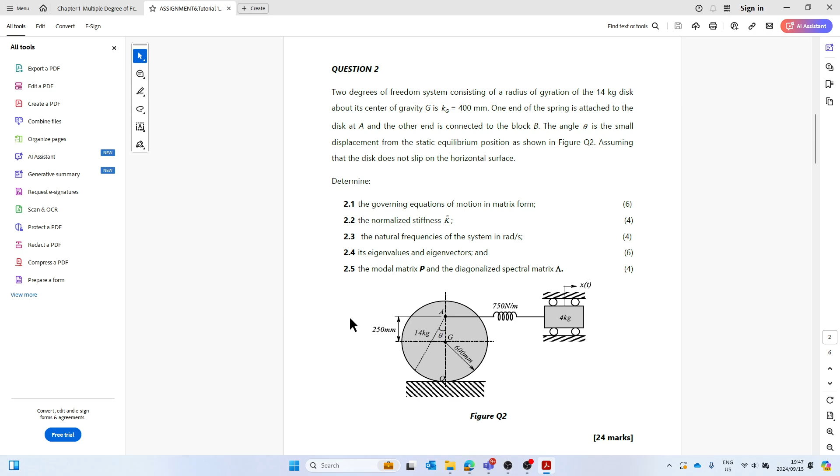So what we're gonna do tonight is start with question 1 and see if we finish it. If we still have time, we can take another question or not. Tomorrow we will do another type, even question 2, that has normalizing stiffness, natural frequency, eigenvalues, and this one. So basically we will be answering all the possible questions that can come under this topic before we move to the next one. You see a lot of figures and this thing looks complicated, but they are cheap.

It's not much, it's cheap. So what you're gonna do without wasting time, we're gonna move on to question 1.

So Mabuza, what we did today, I simply explained how to normalize natural frequency, eigenvalues, and eigenvectors. The good thing is we have not solved any problem yet under this.

Hello, yes I'm talking. I think you were experiencing network issues. I'm not sure if it's my side or your side, but I'm fine. Then it's not your network, you just went quiet. I was just reading something. Oh okay, yeah, because you just went quiet. Okay, then you can continue.

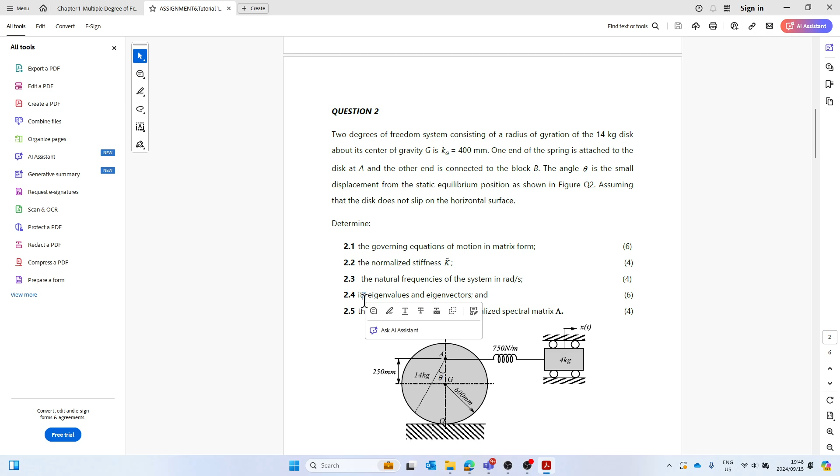Now, what I was saying, basically we explained this, so we have not yet solved a problem on that. So, yeah, what we're gonna do, let's start by solving a question.

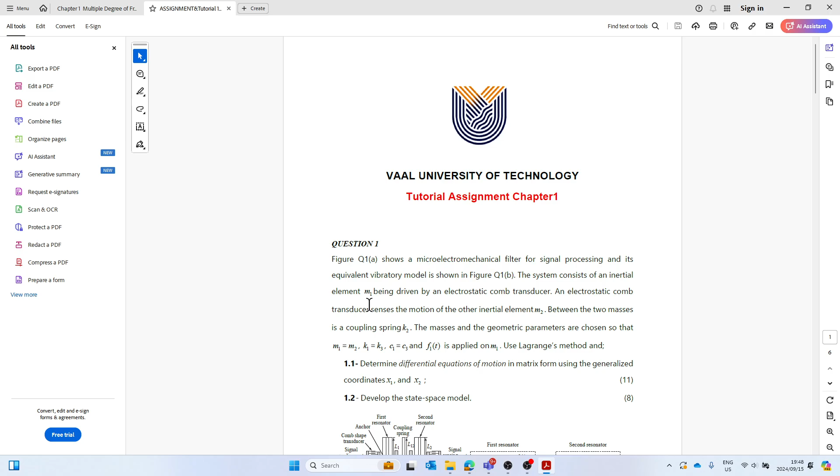Yeah, what is question 1? Did we do question 1? Wait, let me make a call, please.

Yes, talk to me, Malina. Talk to me, you say that we should not redo. Yes. Ah, Mr. Kwoto, I'm okay.

Send, let me see. Hey, Mr. Kwoto. Nah, I'm checking, where is it in the group? Uh, is it the same problem? Let me see.

Yes, did we do the steady state question? Did you do the steady state? Can you please add a quick recap of what you did? Wait, when did we do this one? Eh, okay.

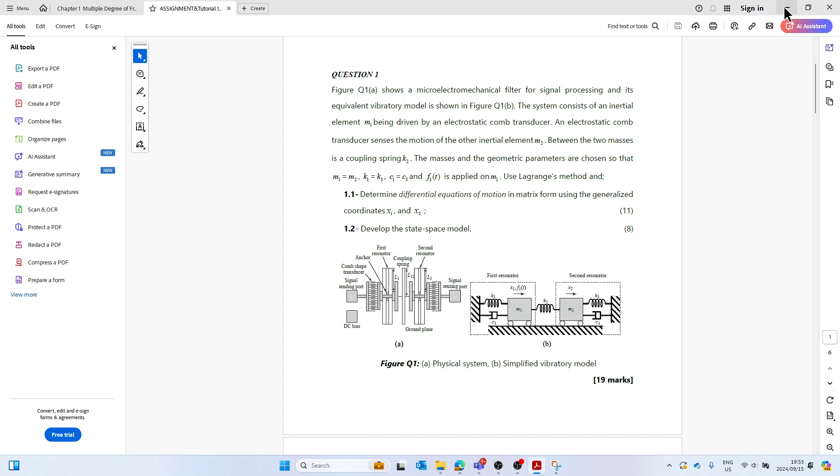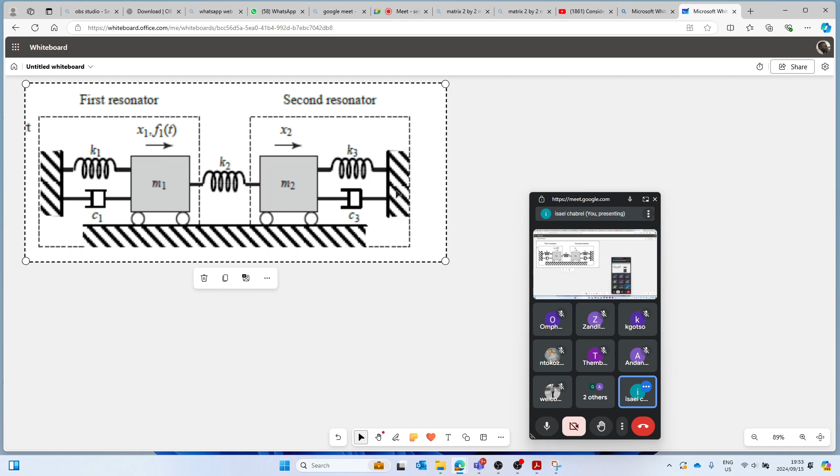Okay guys, this is question one. I think I received the text - can you please quickly recap what you did yesterday so I have a clue where you are?

I don't know how I can do a recap on that. Definitely don't know how, but literally we did not do any calculation basically.

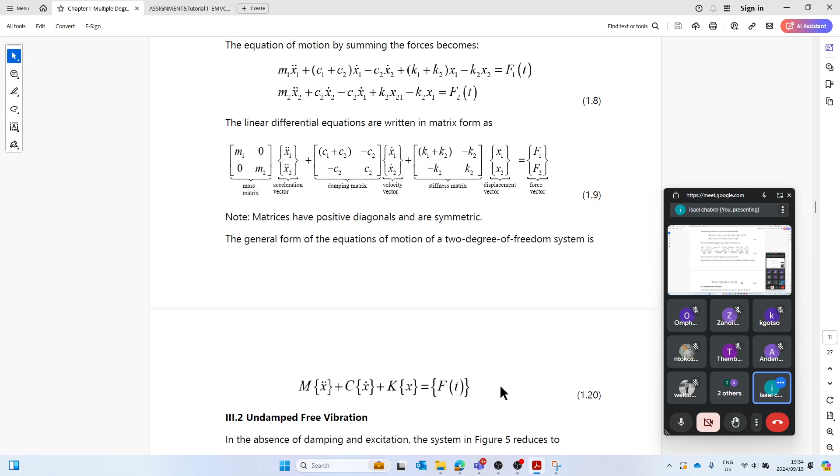So what we did, we went through this explanation of how they got the angular speed.

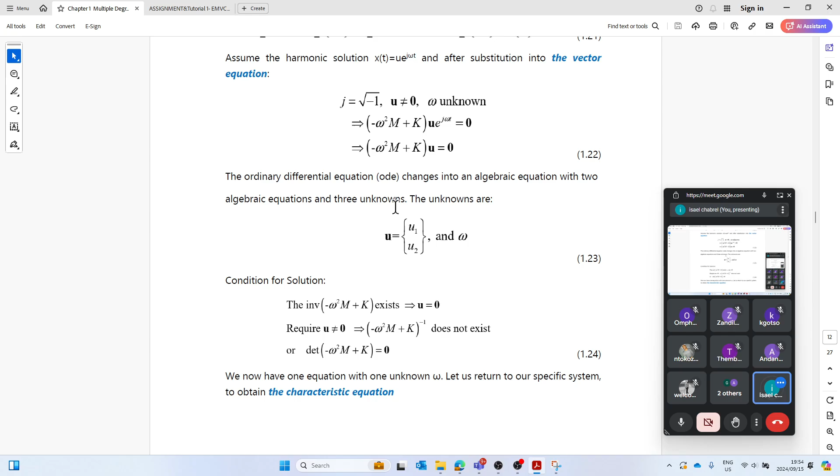Yeah, we actually saw how to get this vector, and what just by explanation.

So what I was saying is this question of eigenvectors and eigenvalues, they are under question 2 and some other questions here. So actually you did not miss much, if I can say. So what we're gonna do, we're gonna see them through our questions.

We're gonna find them through our example, actually through the question given to us. We're gonna solve those problems.

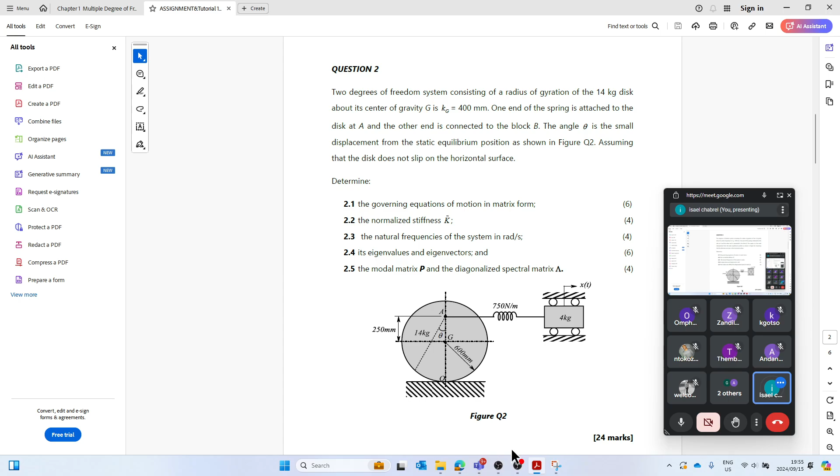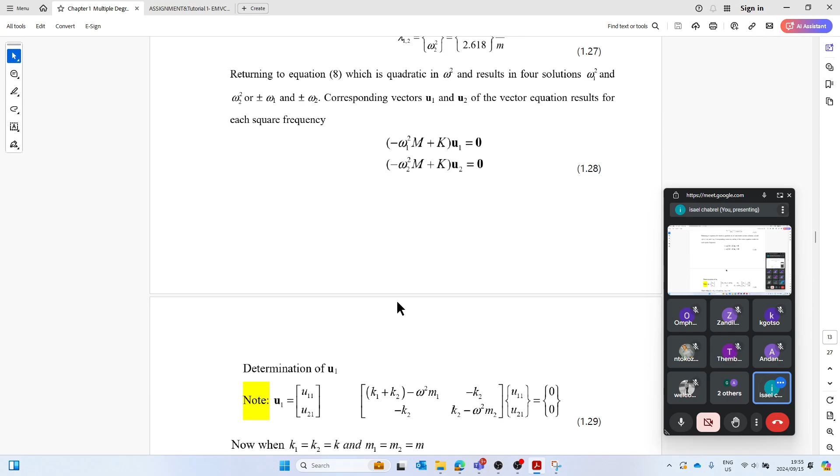Because if I have to do a recap, it means I basically have to explain how they get the angular speed here, how they get the eigenvalues, how they get the eigenvectors, and that's gonna be a lot of time. And yet we still gonna have to solve it, which is basically the same thing. So what I can just ask you as a favor is make sure you attend all the classes.

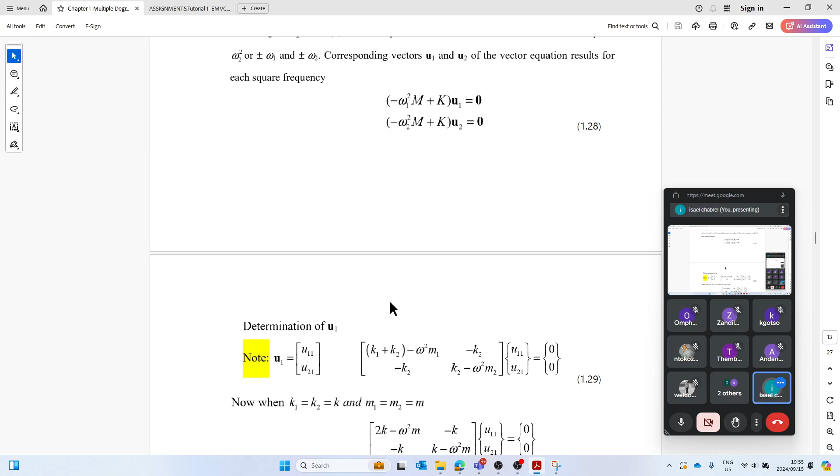So that we can all be on the same page, because during the question we're gonna solve everything that is under this topic. Yeah, I think that's the best we can do.

So what's happening is this is your question one. They want you to find the differential equation, and the method that we use here is Lagrange's. We've got a couple of videos on my YouTube channel about Lagrange's.

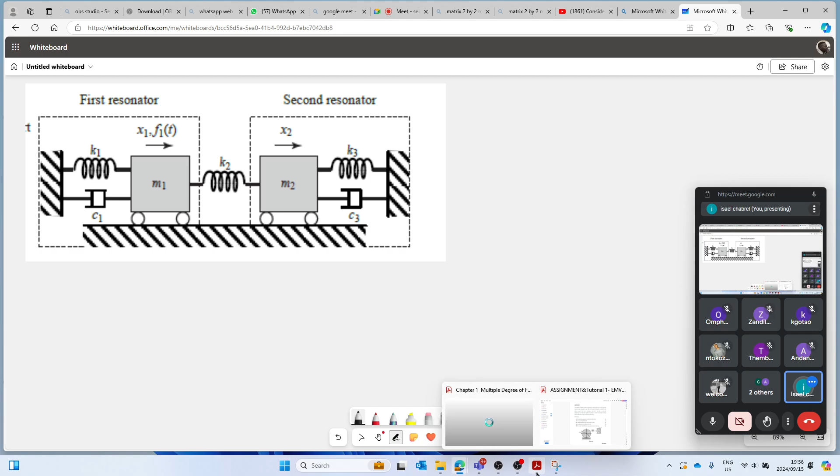So what you have here, you have a system of two masses, M1 and M2. The problem is simply saying for question one, microelectromechanical filter for signal processing, its equivalent vibratory model is shown. The system consists of inertial element M1 being driven by an electrostatic comb transducer, and the electrostatic comb transducer senses motion. This is just the English explanation.

Between the two masses is coupling spring K2, and they are saying that the masses and geometric parameters are chosen so that M1 equal M2, and K1 equal K3, C1 equal C3, and Ft is the applied force on M1. Use Lagrange's method.

This is the method that we've been using to always get the differential equation. So we're gonna use this Lagrange's method to determine the differential equation of the generalized coordinates x1 and x2, and then we're gonna develop the state space model of this system. So yes, let's do it.

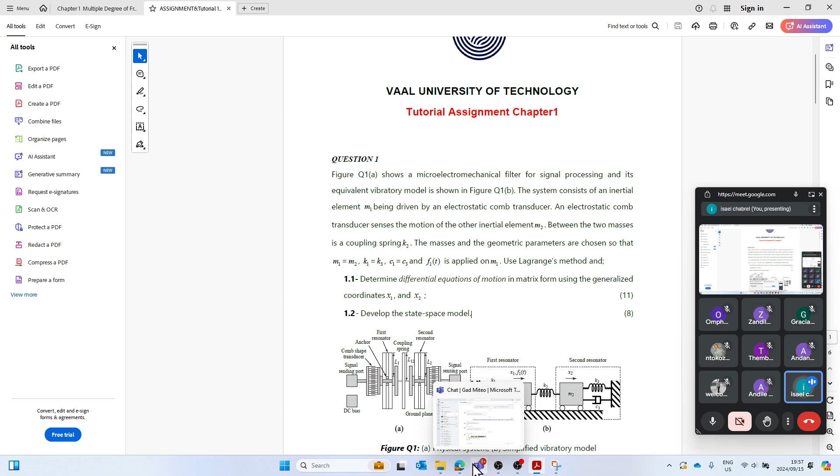So how do we do Lagrange's? What is this thing? This is what we have. Take this down, this is taking my space.

So Lagrange's, this thing is under - there's one or two videos of Lagrange's on my YouTube, you can check it.

So what we do on Lagrange's is we identify the kinetic energy, the potential energy, and then the damper. There is a way they call it again, but it doesn't matter if we don't remember it. What matters is how to solve.

So what do we do? You write the kinetic energy, Chi. Kinetic energy is equal to half - here you have M1 X1 dot squared, plus half M2, this is how you write Lagrange's, X2 dot squared. Remember, kinetic energy in physics, we say it is half mass times velocity squared.

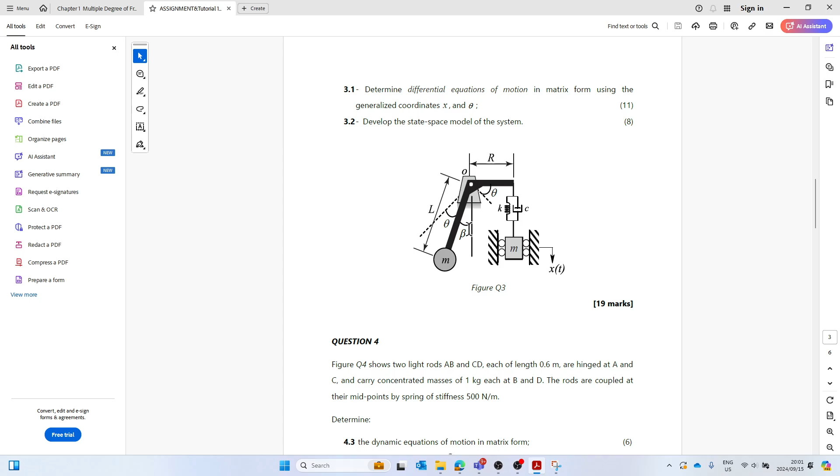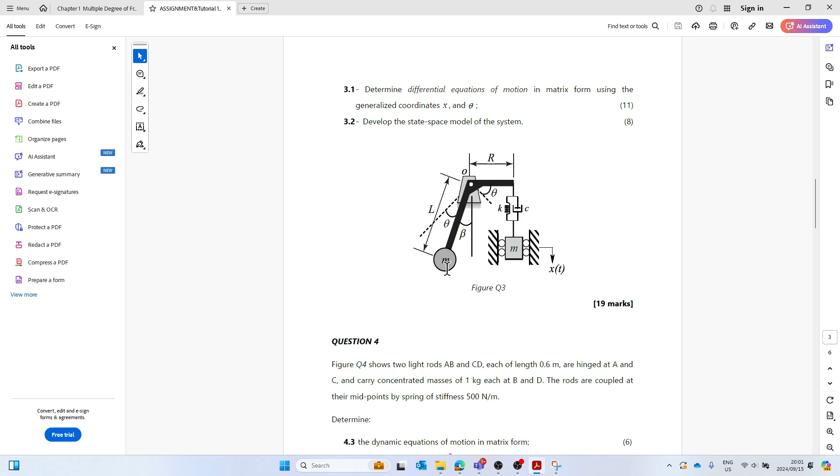By that, what do I mean? If you look at a system like this, just a quick clue, a system like this one, it will have potential due to the weight because this object is rotating. Therefore, as long as it is rotating, it means there's a difference in height, and if there's a difference in height, it also means there is potential due to weight. Also under this case here, you see the potential due to weight.

So in our case, our mass is linear. You can see there is no change in height of the mass. That's the reason why, when we are solving, we will not have any potential due to weight. So under this circumstance, we only have potential due to the spring.

So in this case, we're going to have half for the first one, for the first spring, half k1 x1 square plus - but now look at this spring 2 here. Spring 2 is between m1 and m2. Due to that, it has to have a change. So what is the change here? It is half k2, and the change is going to be between displacement of m1 and displacement of m2. So under this case, it's going to be x1 minus x2, everything squared.

That's it, and then you move to the third element here. It is this spring attached to this mass, which is simply plus half k3 x. The displacement is x2, displacement due to mass 2, x2 square. So any questions, guys? We can do this fast.

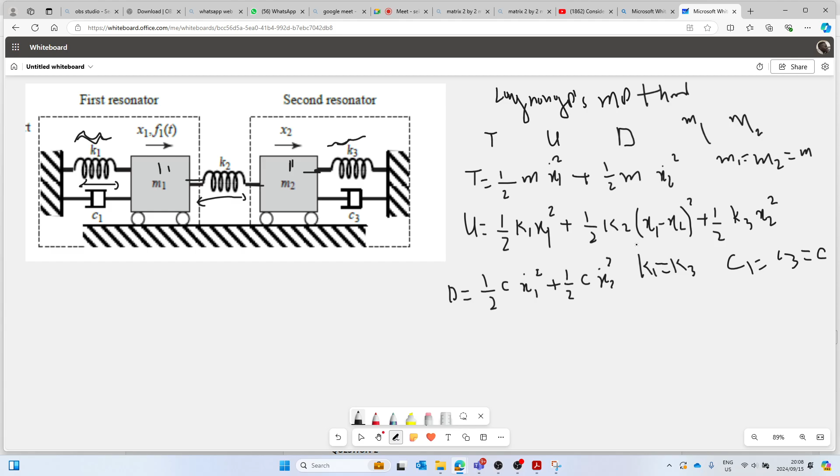Here we go. So what do we do? If you remember Lagrange's formulas, this is the formula of the Lagrange.

Hey, yes, Mr. Maras. Sorry, I'd like to ask something here. No, you're not sorry, you must ask if you have something. I thought I'd disturb you. No, don't.

For the kinetic energy, the x's are the velocities, for the kinetic energy.

Mr. Maras, to answer your question, remember in Math 1, if you have displacement x, if you differentiate this in terms of time, it gives you velocity. If you differentiate velocity in terms of time, it gives you acceleration. But in physics or mechanics, the velocity will be represented as x dot, and the acceleration will be represented as x double dot. So the kinetic energy, because we know from physics, it is half m velocity squared, and the velocity is squared, so the velocity is being replaced by x dot only.

Okay, and then for the potential energy? The potential energy is the displacement. If you guys remember, Mr. Maras, for the spring, the formula is force equals k multiplied by x.

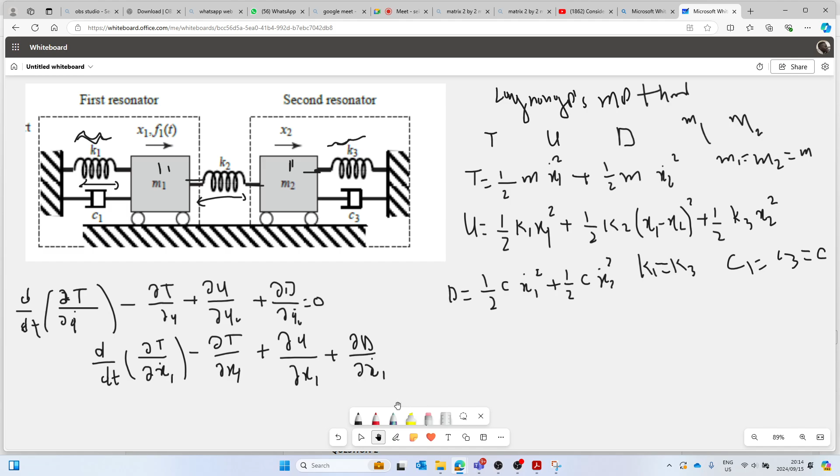So what do we do here, guys? Look at the formula how it's written, but if you're comfortable enough, if you've been attending, you should be comfortable when we talk about this partial derivative. This is what it means. When we say partial t, partial x dot 1, we are talking about partial derivative. Do you know what is partial derivative? You are differentiating partially the kinetic energy. So what does it mean? You scroll up, you look at the kinetic energy equation. Wherever you do not have x1 dot, it is 0. They are taken as constant. Differentiation of a constant is 0. So under this topic, we only have x1 dot for the first one here.

So differentiation, Mr. Maras, when we differentiate this, it's simply going to give you mx1 dot.

Hey, you're moving too fast, eh? I won't move so I'm fast. Confused here. Can you please start from the first equation? Can you please just explain clearly? Oh, the equation, eh? Sorry, Sisi. I'll go slow.

Okay, this is the general formula of Lagrange. The Q here simply stands for the variable that we are working on. So under this topic, we only have two variables, which is x1 and x2. So we're gonna be doing the Lagranges of both variables. First, we start with x1. So it simply means wherever you have a q under this formula here, you replace them by x1. Is that one fine?

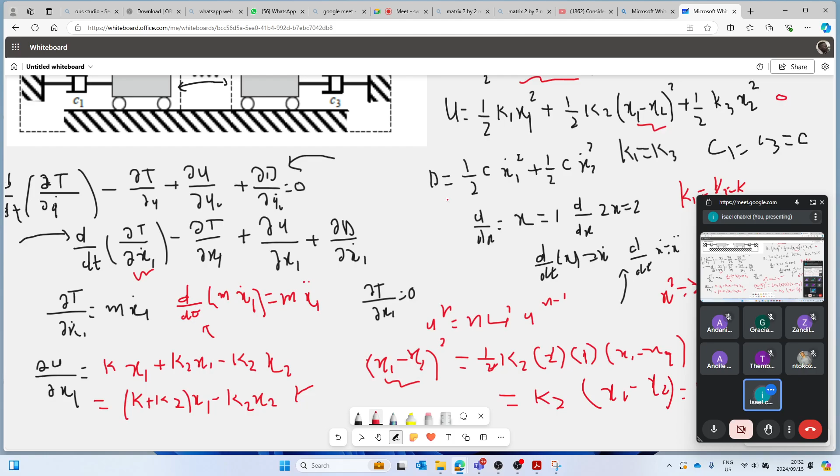Yeah, okay, this is where we were. So now we have to do the same thing with also here the damper. Now we have partial damper.

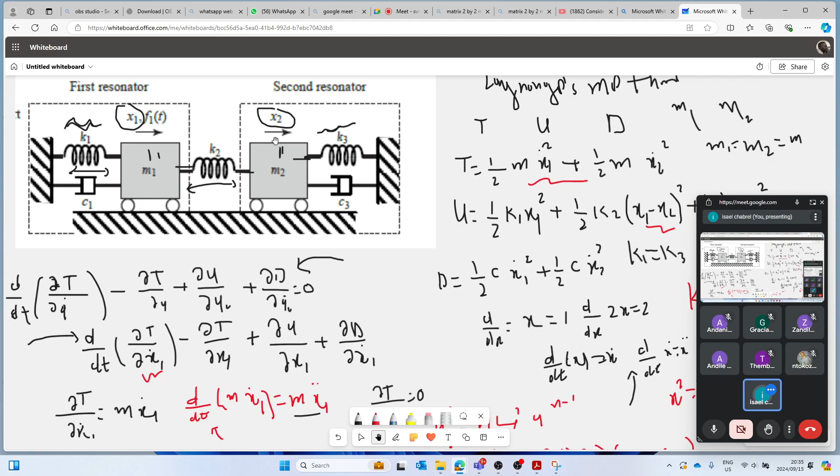So in this case, system 1 will be equal to f1 of t. So this is the first equation of the system using Lagrange's. Any equation, guys, this is how we do it.

We're going to do the same thing for x2. Let me call this equation 1. Let's do it to find equation 2. So you come again, you write the same formula, it's the same.

Now the only difference here is you put x2, x2, x2, x2. Otherwise it's the same. So what is the first step? You come again, you do partial T, partial with respect to x dot of 2.

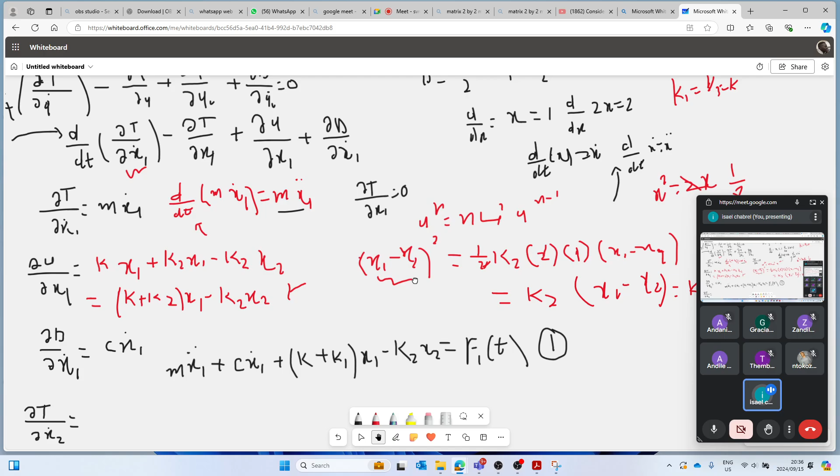Now what do we do again, Mabuza? We check our kinetic energy. Our base is kinetic, potential, and Rayleigh dissipation. This is where everything comes from. Now when you look at the kinetic energy, Mabuza, you look where you have x2 dot. It is only 1, so this part here will be 0.

And when you differentiate, what happens? The 2 will drop, the 2 will cancel the half. So what is the answer?

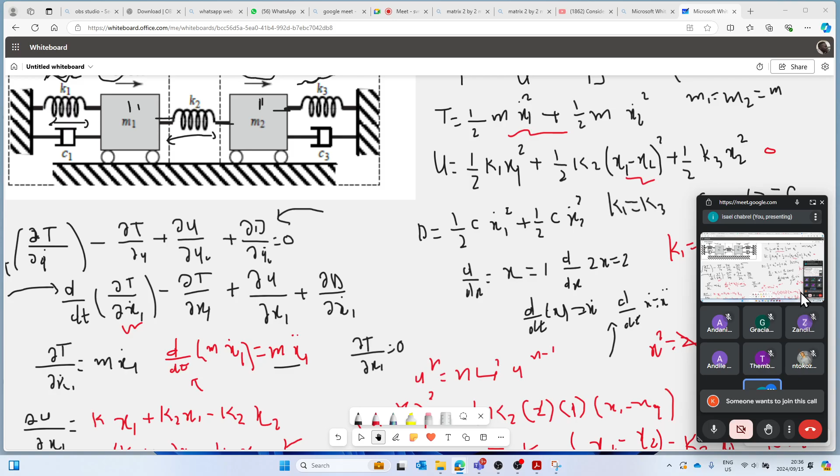Oh, Mr. Kabamba Kalundi. Mr. Kabamba, welcome, my brother.

Yes, so what was I saying? The 2 will drop, will cancel the half, but remember x1 will not exist here, x1 dot, because the variable here... people, don't cut me, I'm in a mode.

So yes, this is what's happening, guys.

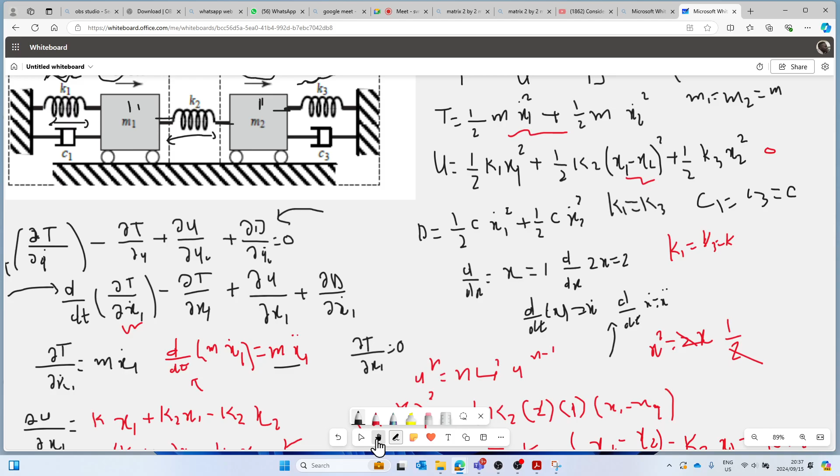Now what do we do? These 2 will drop, so what will be the answer here, Mabuza? Definitely here, the only answer we're going to have will be mx dot 2, same thing as this one.

Now you do the partial with respect to time of this answer. It's repetitive. What's the answer here? The answer will be mx dot dot of 2.

The reason why it is dot dot, now guys, remember the variable is time. Please pay attention on this. Do not make a confusion here.

Now what do we do again here, Mabuza? We do the same thing. We go partial u, partial x2.

Now we come up here on our equation again, Mabuza.

Wait, I'm struggling to repeat your name a lot. So is it fine for review?

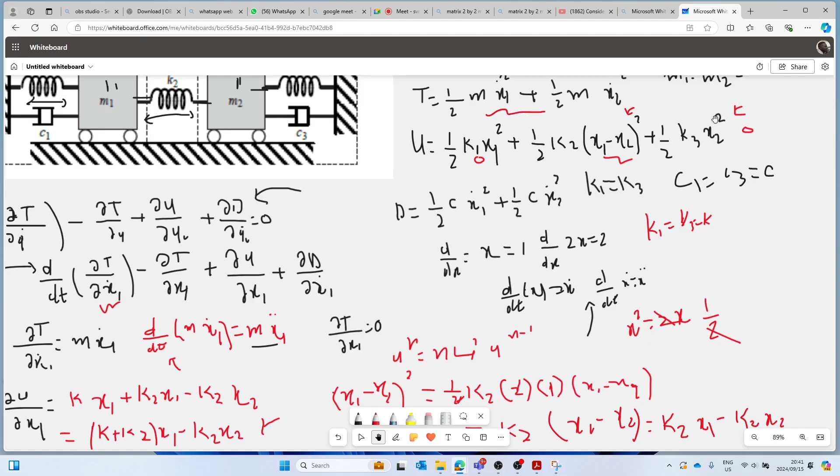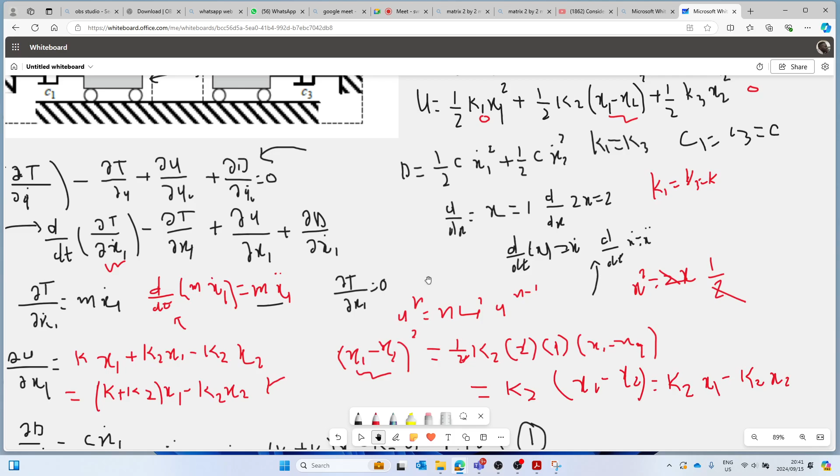But remember, alongside with it, we have this one, which is half k3 x2 square. So when you differentiate, 2 will fall. You're going to have k3 x2. And yet again, they said k1 is equal to k3, which is equal to k. So simply what you're going to have is kx2 as answer when you differentiate.

Thank you, Malida. So now we can create a common factor here, my brother. We can create k plus k2, everything to be x2, and then minus k2 x1. Now,

Mabuza, please let's pay attention. We do for the damper, it is partial d, partial x dot 2. So what do we do? We go to the equation of the damper, this guy here. I don't know if you see my mouse. Now we are dealing with x2, so definitely this one will be out. So our main concern is this one.

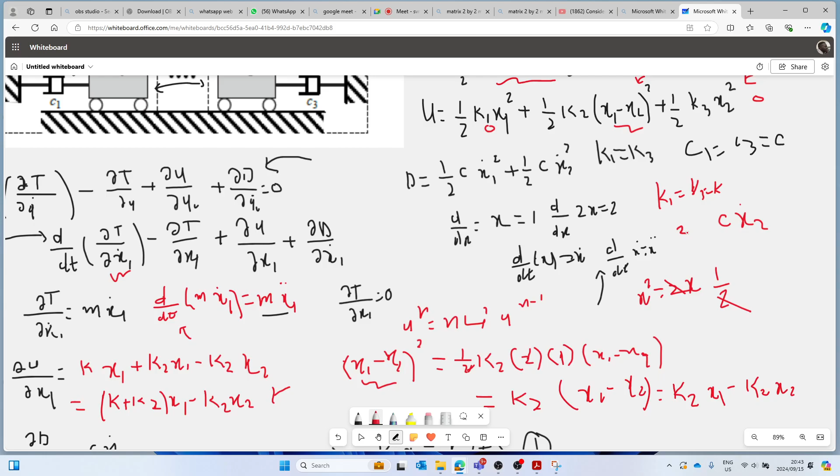So what happens? You differentiate x dot square 2, so you're going to drop the 2. 2 will cancel 2. So the only thing that you will be left here when you differentiate, Mabosa, it is cx dot 2. That's the only thing, because the 2, when it drops, it's going to cancel this half in front. Is it clear, Mabosa?

Yes. So what we have here, it is cx dot 2. Now yet again, what do we do? We write this equation like for the first one. Equation 2, you copy the first answer that we got here, which is m x double dot 2. Now, same order, we start with the damper, c x dot 2. What is next? You start with the spring, k2, k plus k2 to be equal to multiply by x2 minus k2 x1, everything will be equal to 0 for this one.

Why is it equal to 0? Because when you look at system 2 here, there is no external force applied like on system 1. That's simply the reason.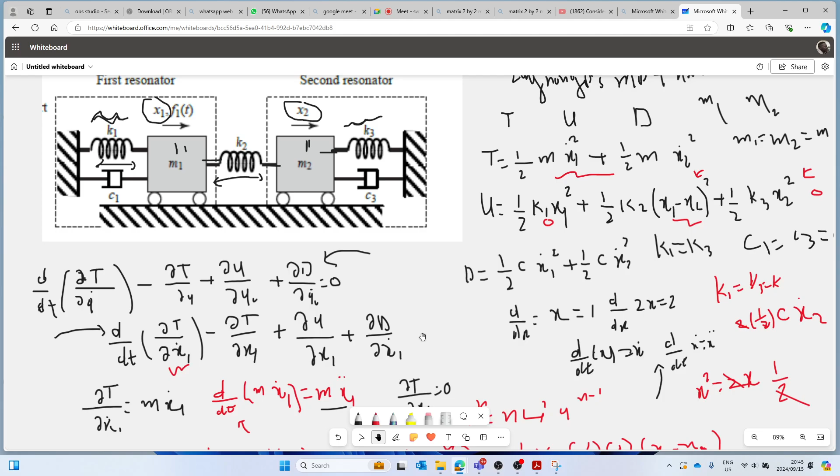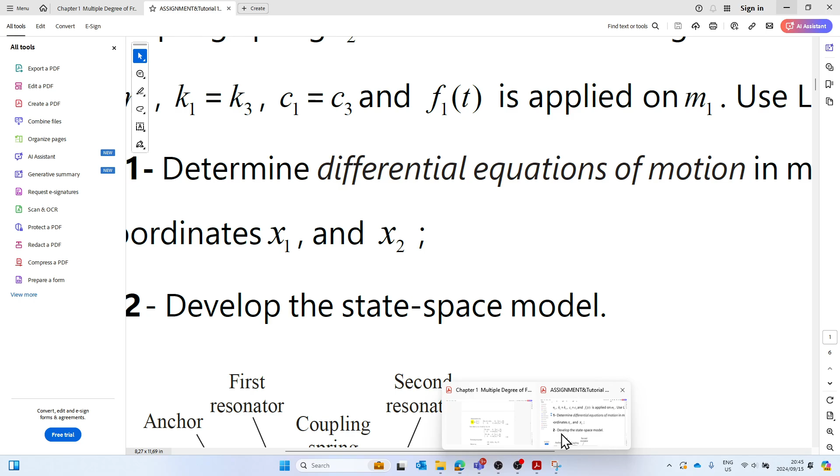Now what do we usually do when we have this system? They ask us to write it in matrix form. It is always asked, so we have to know how to write it in matrix form. Even here they ask to determine the differential equation of motion in matrix form. So let's do this. Even if it is not asked, please write it in matrix form.

So how do we write it in matrix form? Usually what I do is I always recall both equations, equation 1 and equation 2. Before I write it in matrix form, it helps me to see what I need. So I'm just going to, I don't know if I should rewrite it or just copy it.

Yeah, I can copy it, Control C, bring it here, Control V. But unfortunately, you can't copy on your test, you have to write. But on my Google doc here, yeah, I can do that, I can copy. I can highlight everything, Control C, bring it down, Control V.

Okay guys, these are the two equations that we have. Let me delete this one. So this is equation 1 and equation 2. How do you write it in matrix form? Easy as that, you write your matrix like this. You know that under this, you need to get x dot dot 1, and then you need to get x dot dot 2. We do this for the first one.

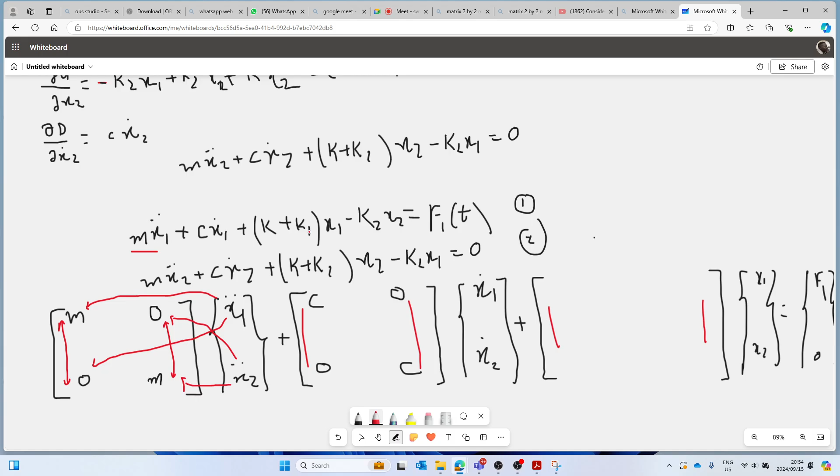So what's happening here, guys? For k, what do we do? Same thing, we look at x1 here. Now let's pay attention, Mr. Maras, x1, do we have an x1 here? This one is still the same thing, it multiplies here and it multiplies here. So for x1, what do we have? We have k1, k plus k1. So you have k plus k1 in such a way that when it multiplies, you have it here.

Do you have any x2? You do, do you see it, Mr. Maras? Yeah, it's there, it's with K2. We do have an x2 in this case, which is this one. So what is x2 here? It is simply minus k2. You can see in such a way when x2 multiplies this, we still find this expression here.

Mabuza. Yes, I understand, you can continue.

Okay, now what is happening down here, Mr. Maras? Do we have any x1? Yes, this one is minus k2. So definitely here I have to get minus k2, in such a way that when it multiplies, we have this one.

Do we have any x2? Yes, it is k plus k2. So now you have written it in terms of matrix form. This is what it is.

But here's the clue, guys: these things, they are symmetric. Whenever you're doing the matrices, these guys moving like this, they're always the same. In all the equations that we do using Lagrange's, these guys moving like this, they are always the same. So what does it mean? It simply means that you can track your answer. It simply means that if you are not having them, this one here, they do change depending on the question, they do change.

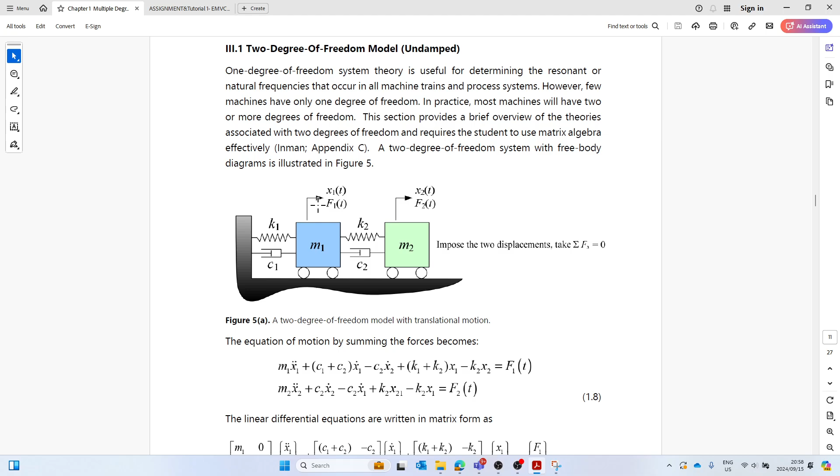Can you see my screen on this one, right? Do you see this figure here, my brother? Yes, I've got F1 and F2. Okay, when they derive the equation, you got F1 and F2.

So to answer your question, your answer is from the question from the beginning. You know which one will be equal to the force, which one will be equal to 0, or if both of them are equal to 0. Okay, no, that makes sense.

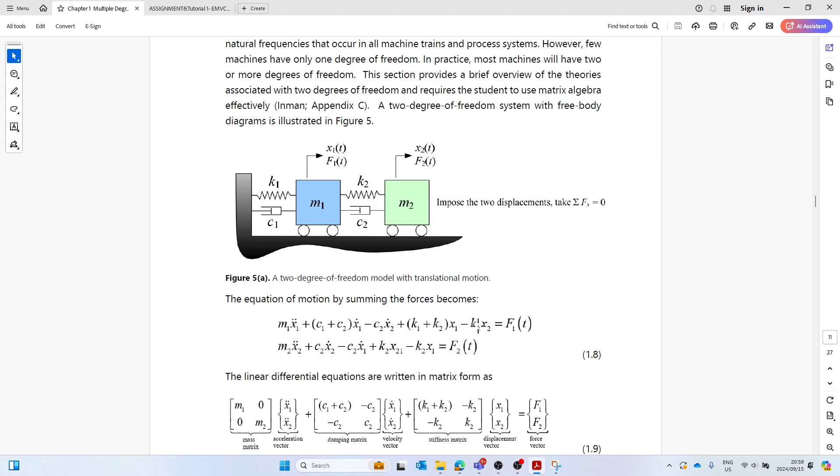Thank you very much. You are welcome, my leader. So this is it, my boss.

So what else? Okay, the lecturer already said in class, the way to check if you are right, you can see this symmetry. If you have it, my brother, it means actually you have it right. If you're not having it, it means you can check where you are wrong. But I don't know if in the test you will have that calmness to go check, because sometimes when you get to question 1 and see a mistake, you start freezing. But you don't have to freeze. Just go back and double check. Definitely you will see what is there.

Any question before we do the state space, please? Any question, guys? Are we good? Can we continue, guys?

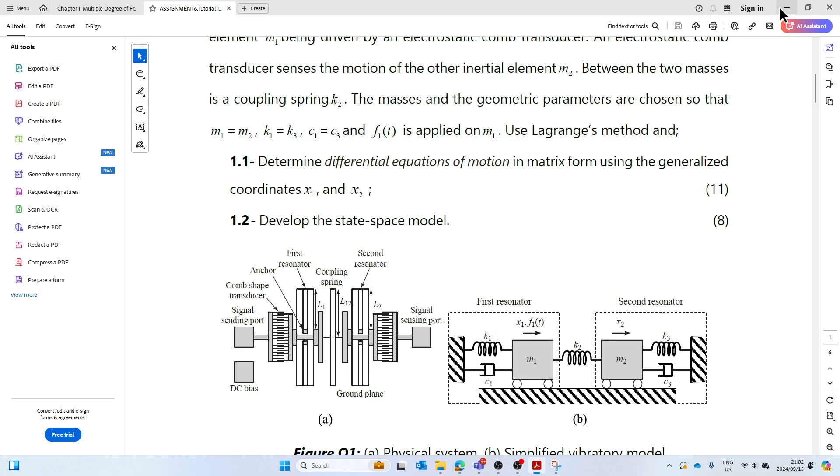Develop the state space model. Guys, this state space model, I'm pretty sure they will give you a project on this. I'm not sure if it's on vibration, but I believe it's on this one. The reason why you usually develop a state space model is simply to come out with a simple expression that you can put on MATLAB to do your simulation. It cannot always be MATLAB as the software used for simulation, but MATLAB is one of them that our lecturer wants us to use. So, state space model.

Okay, here we go, Mr. Abubakar. How do we solve the state space model? There's actually one formula to use. Everything should be in terms of z dot. I like calling it z to avoid confusion. Some people put x dot there, but I like calling it z, in terms of z dot equals Az, let's say, plus Bu. I think there's another formula, but let's take this one first.

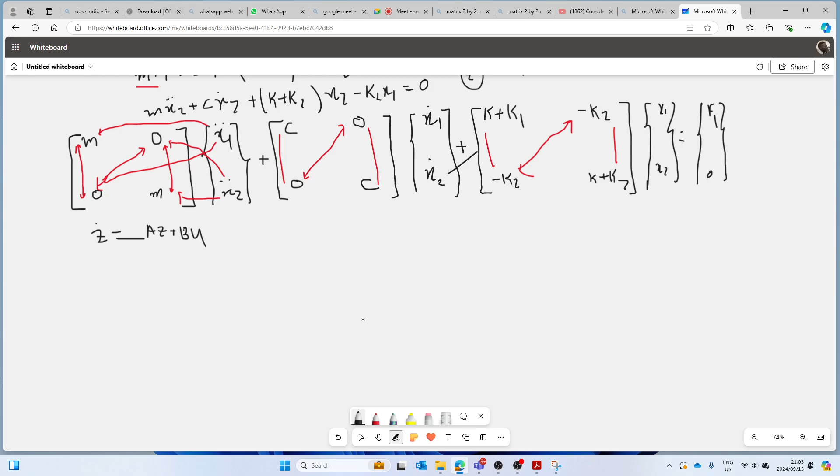Let's do this one. So what does it mean, Mr. Abubakar? Basically, what we are doing, Mr. Abubakar, we want to simplify this equation in such a way that... wait, can you guys see my screen, guys? Hello?